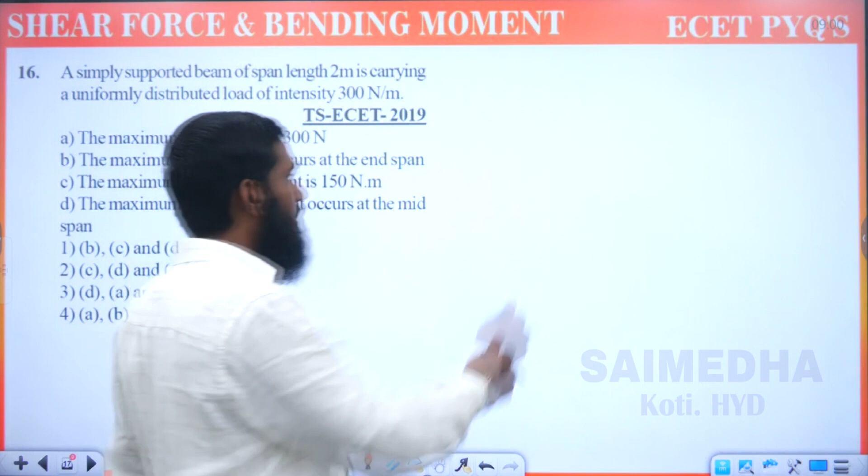Okay, so first let us try to diagram what we are having over here. Simply supported beam - if you are having a simply supported beam, so this part we have taken, this is the simply supported beam. Now next point, length - how much we are having over here? 2 meter. So this complete length we are taking as 2 meter.

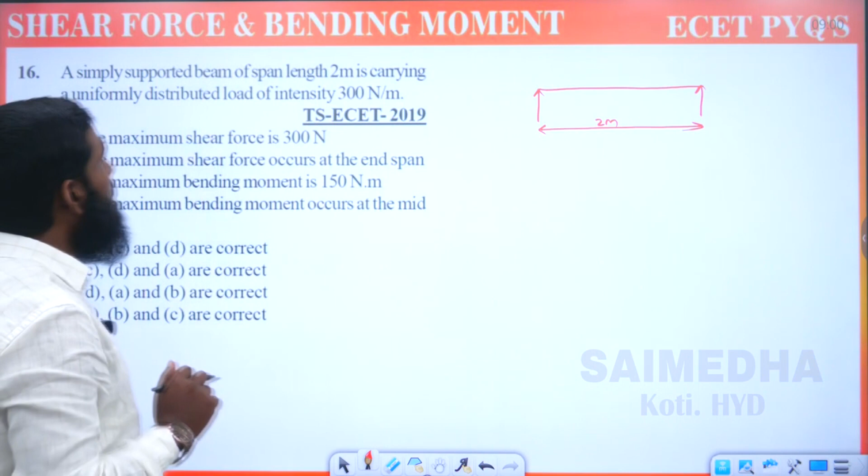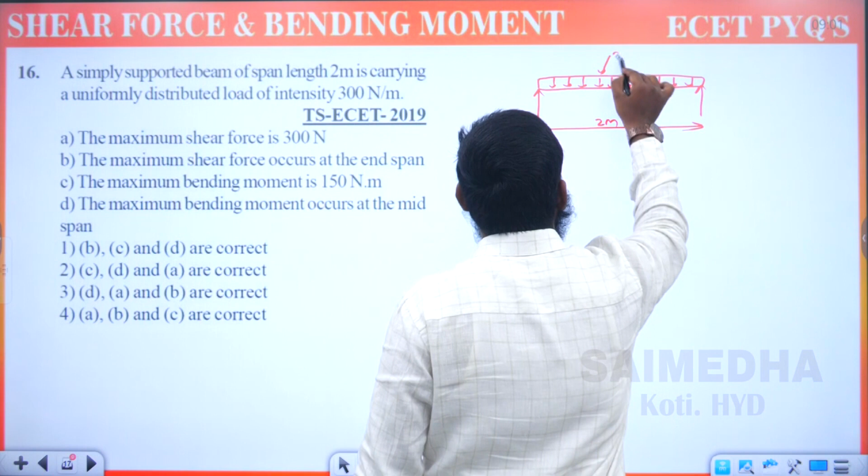It is carrying a uniformly distributed load. Now we are having uniformly distributed load over here - this is UDL. How much we have taken? UDL means how much we have taken over here? 300 - this is 300 Newton per meter. So 300 we have taken as the UDL.

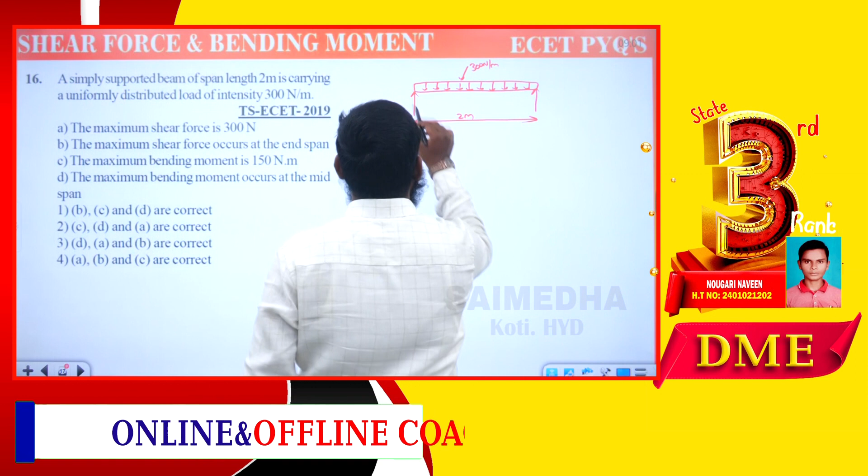Now we are having some options over here. So first let us go with this part. Let us take this point as A, this point as B. So this is RA, we are calling it RA, this is RB we have taken, and somewhere in the middle we are taking it as point C.

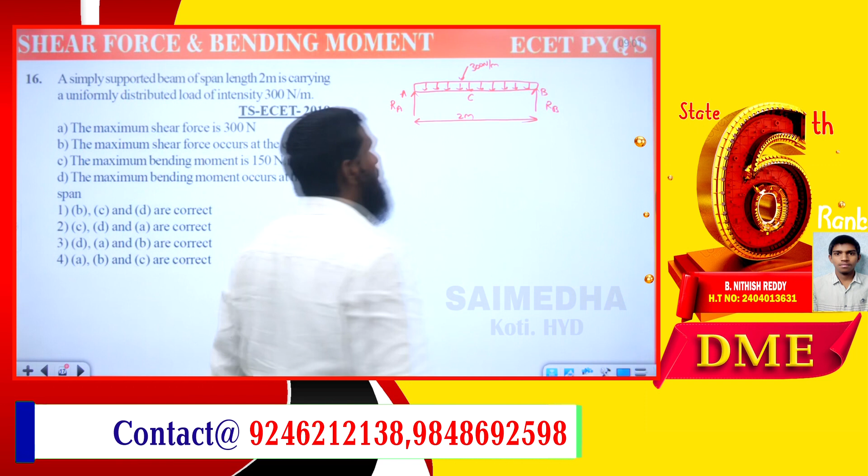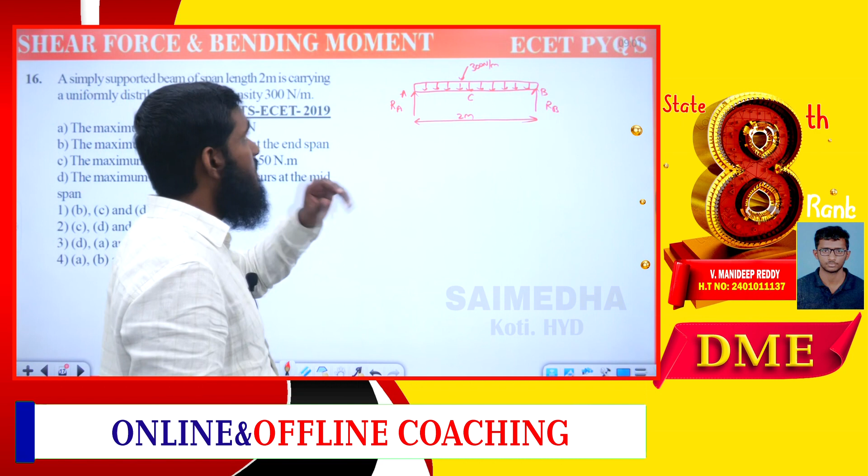Okay, so already we have discussed this question in detail - we have written it in detail over here. So what we are getting in this part - the maximum shear force, what is the shear force we are getting? First let us try to calculate the RA value and RB value.

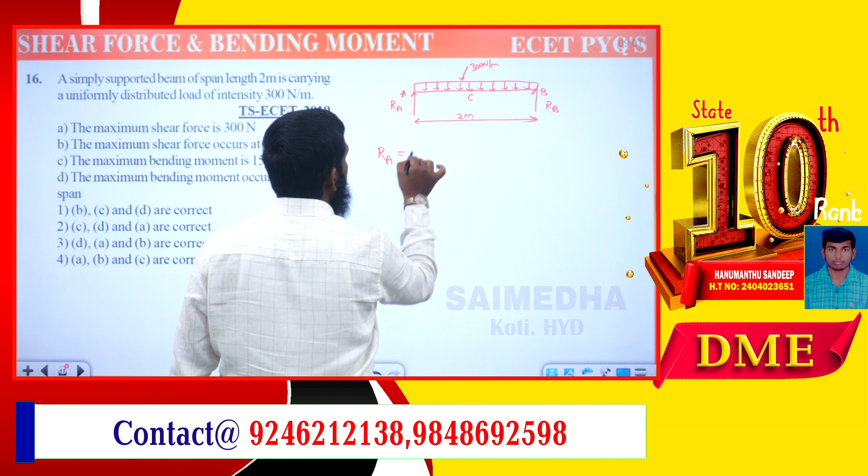RA value is equal to RB value because we are having UDL. If you want to convert that UDL into a point load, it will be in the middle of that part. So RA is equal to RB, which is W into L. W into L means 300 into 2.

Divided by 2, W into L by 2, that is for the UDL part. Or else if we are having a central point load, we have to take W by 2. So over here, as we are having this, the 2 gets cancelled, and it is equal to 300.

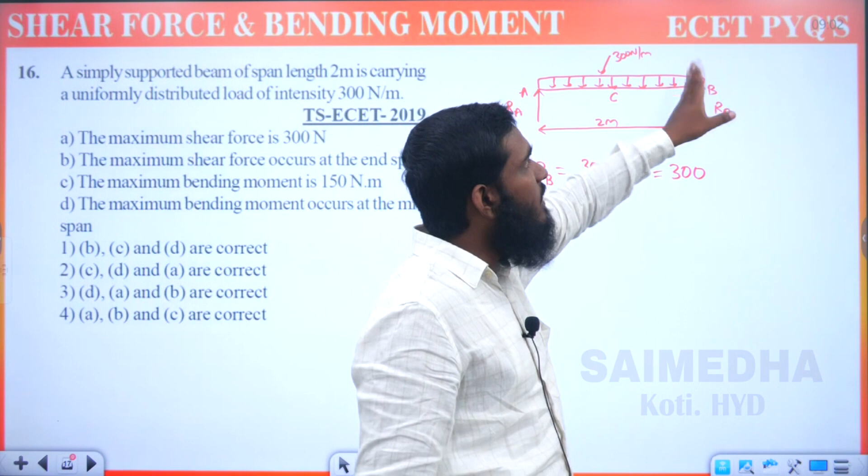Now let us see this part. So RA equals RB is completed. But whenever we are calculating the shear force, listen carefully. This part, shear force at point B, it becomes minus 300. Because if you are drawing the imaginary line over here, it comes under quadrant 4. Quadrant 4 means we have to take negative. Quadrant 1 and quadrant 3 will be positive, but quadrant 2 and quadrant 4 will be negative. So this part we are getting as minus 300.

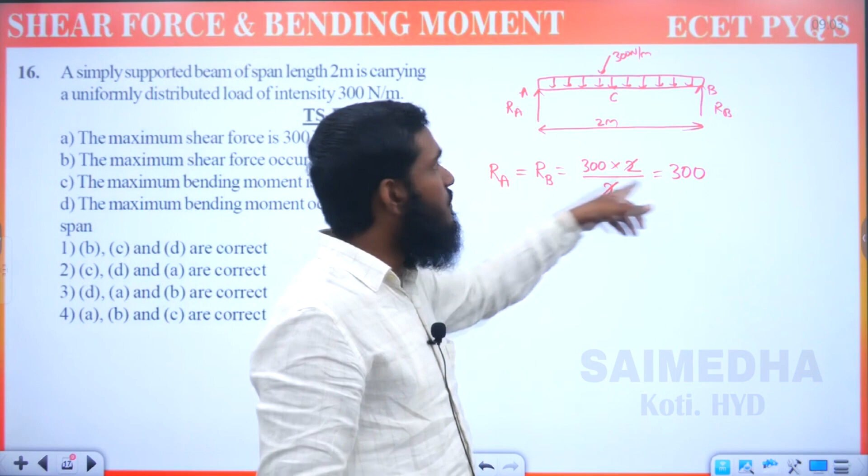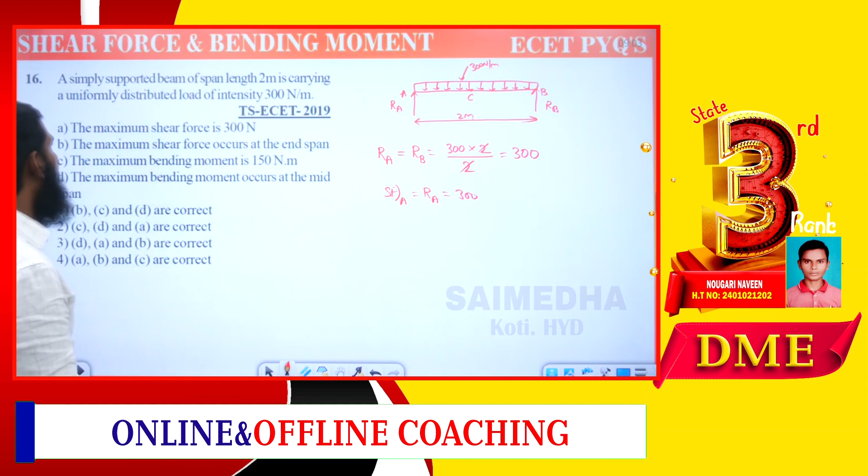And we have taken some section over there. In the previous question we have done in detail about that part. So shear force at point C we are getting as 0. Then shear force at point A is equal to RA, which is equal to 300. So this part we have taken over here. 300 newtons means option A is correct.

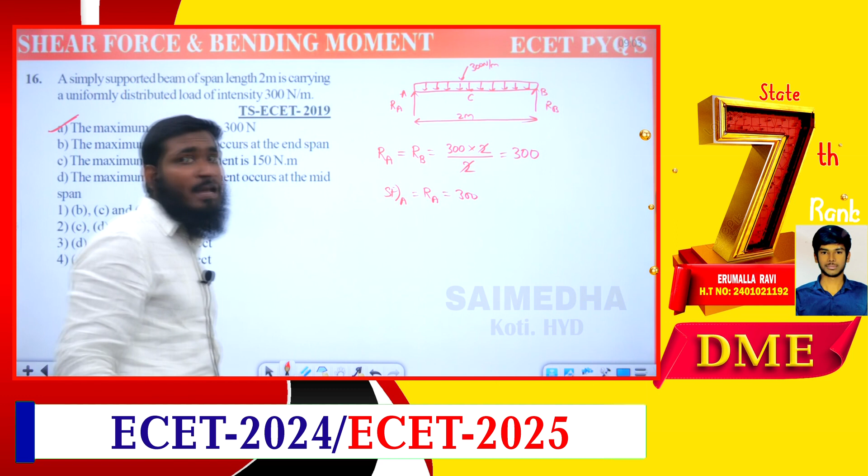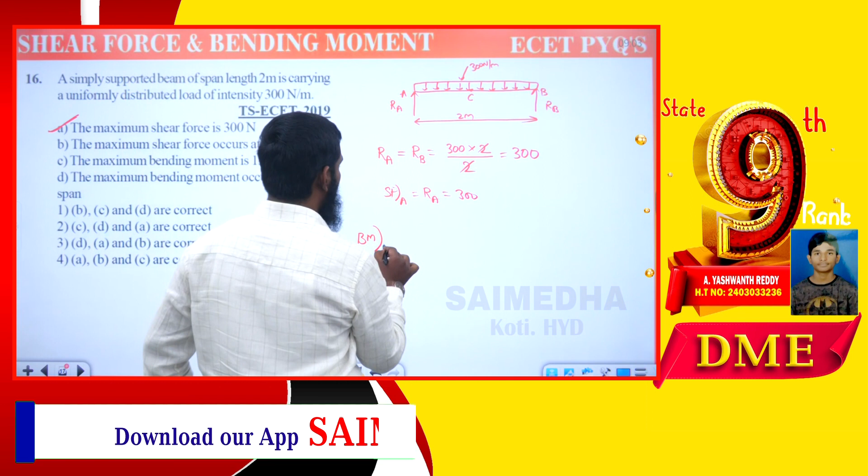Now next, what we are taking: the maximum shear force occurs at the end span. End span means we are not calling this part end span. Let us go for maximum bending moment. What is the formula for maximum bending moment over here? So bending moment, as we have discussed, at point A is equal to bending moment at point B, which is equal to 0.

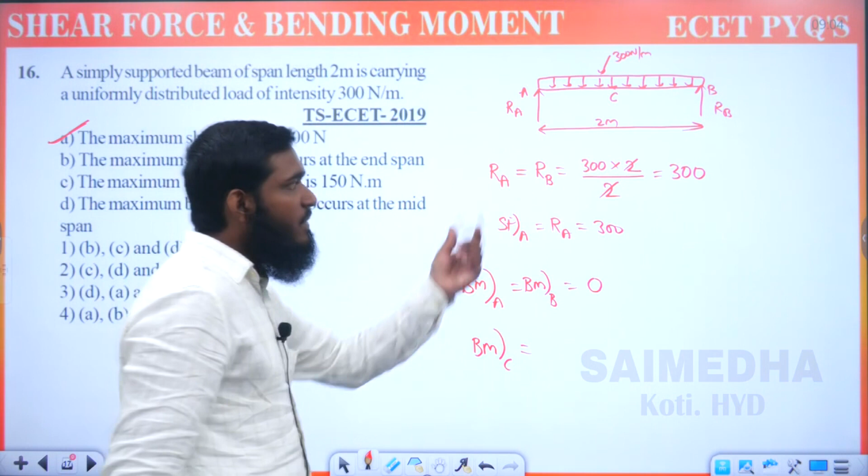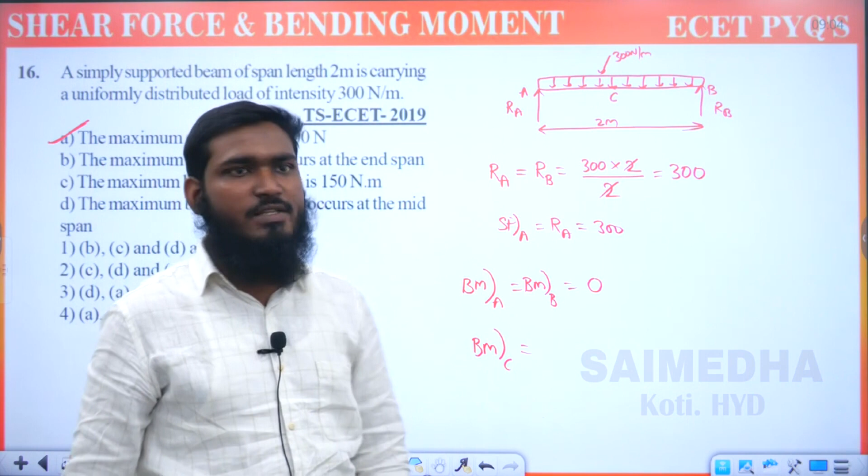Now at the supports, whatever supports we are taking over here, bending moment at point A and bending moment at point B, directly we can write the answer as 0. But bending moment at point C is equal to... shear force at point C becomes 0. So whenever the shear force becomes 0, bending moment becomes maximum. We have taken that case over here. So bending moment at point C, we have to remember that formula: WL square by 8.

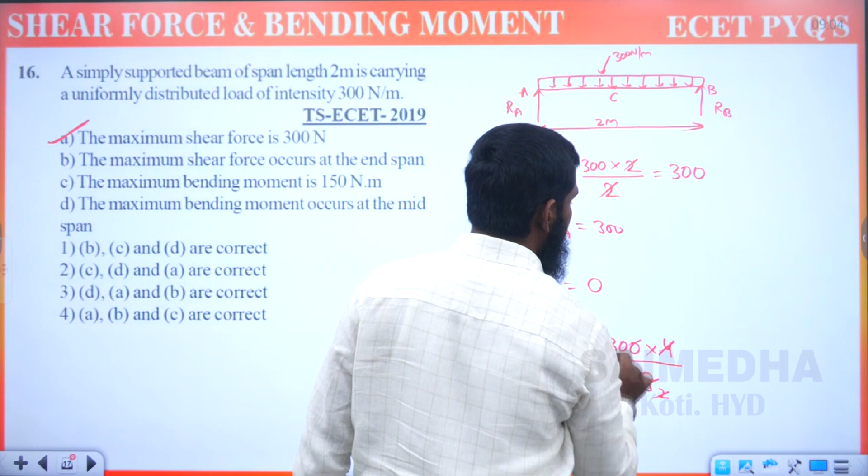What is the formula we have to remember? WL square by 8. Now what is the W value we are having? W means 300 we have taken over here, 300 into L square, L means 2 square is 4, divided by 8, that gives 150, Newton meter. So 150 Newton meter, whatever the maximum bending moment we are having, it is equal to 150 Newton meter.

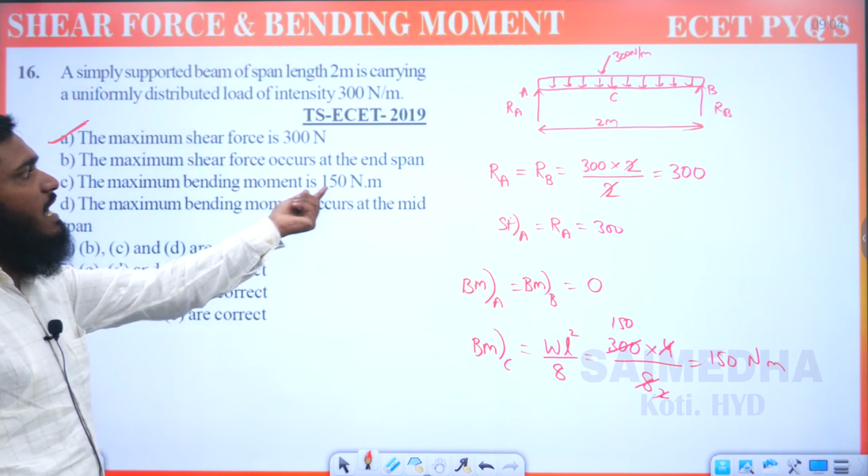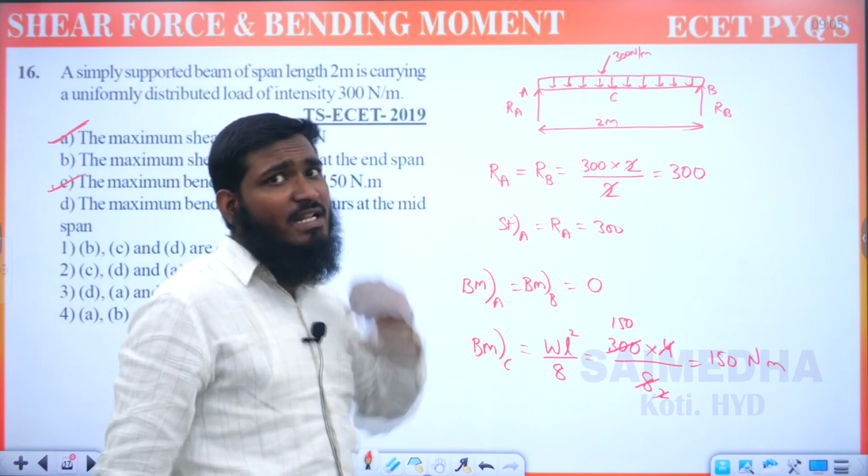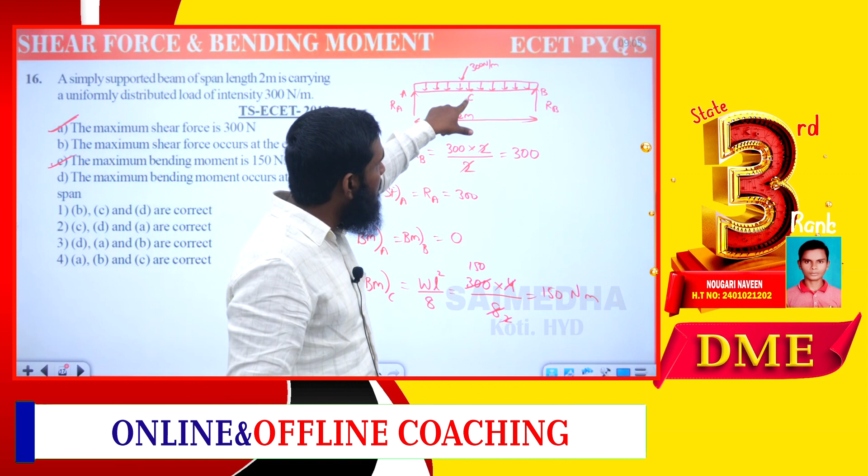So this option C is also correct. Now next, the maximum bending moment occurs at the mid span, because where we are getting the shear force, if you have taken point C, at that point shear force becomes 0. So if the shear force becomes 0 at point C, at that point only we are getting bending moment as maximum, meaning the midpoint. At the midpoint we are getting maximum bending moment. So point D is also correct.

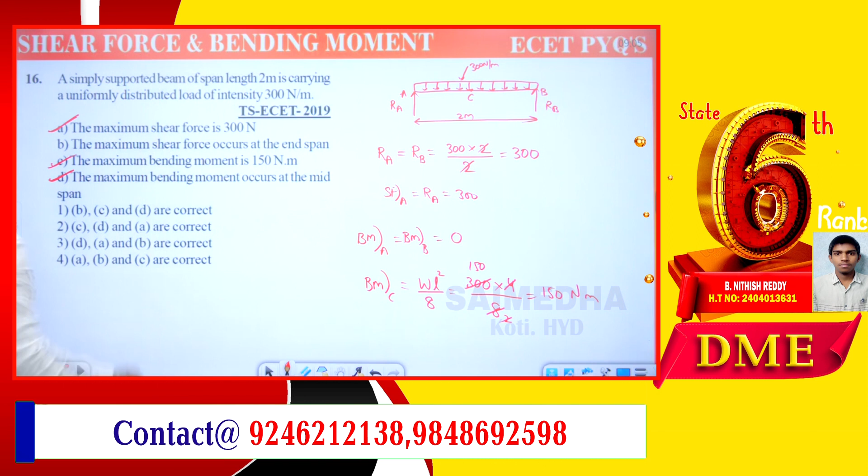So ACD, suppose if you are going with ACD over here, what is given?

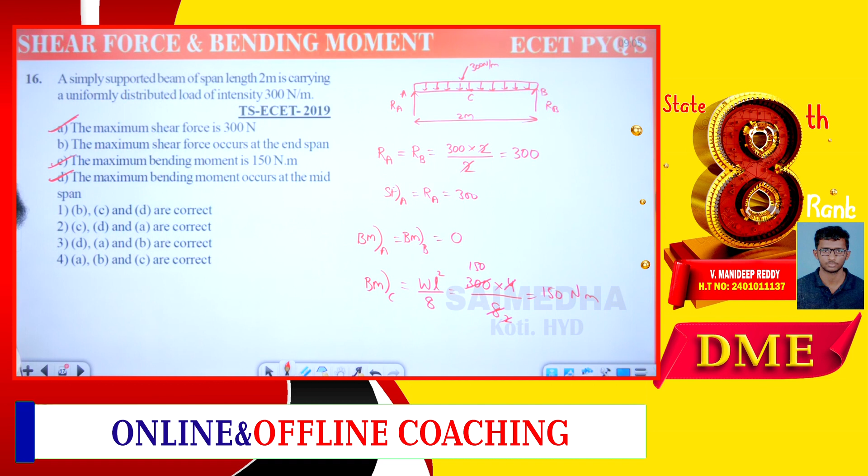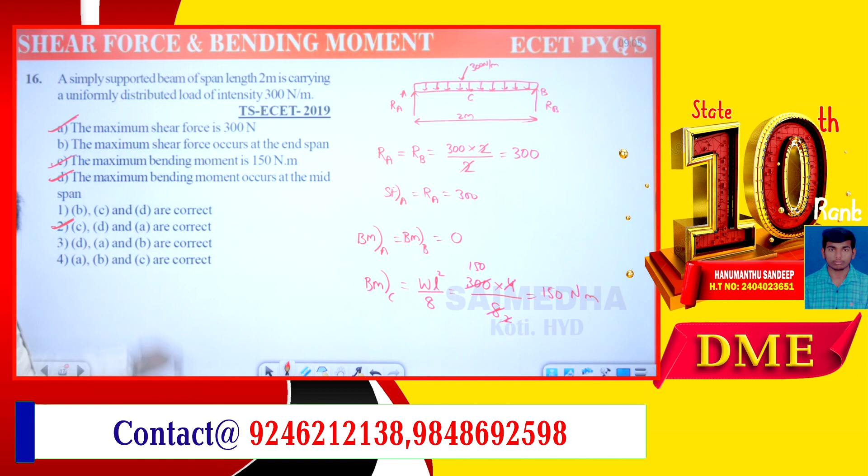BC, only BCD is given, CDA is given. A option, D option and C option means second. Okay, second option is correct over here. Now we have to find out only the force value; we have done the bending moment value.

Now we are having one relation between shear force, bending moment and the rate of loading. What is that relation? Whenever we are differentiating moment, d by dx, what are we getting? A shear force.

Over here also, whatever the bending moment is given, if you are differentiating this part, we will be getting a shear force. Again if you are differentiating shear force, then we will be getting rate of loading. Like that we have to remember these relations. If you are differentiating bending moment, it is equals to shear force. If you are differentiating shear force, it is equals to rate of loading. So let us differentiate this.

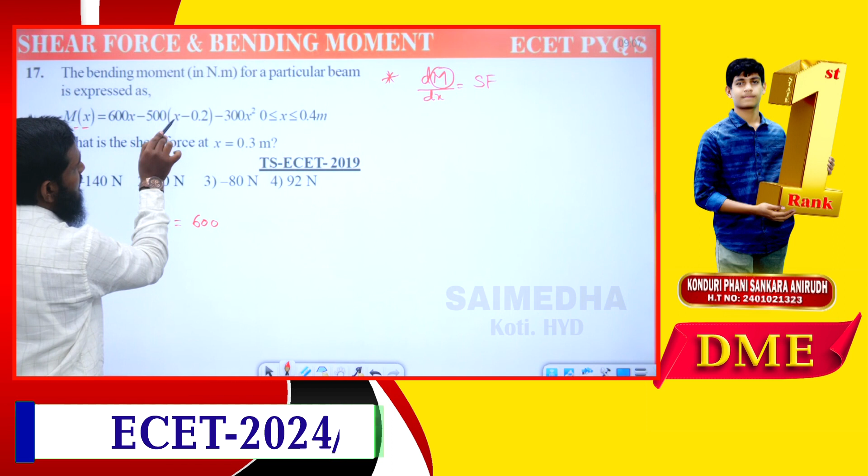Now if you are multiplying with this, minus 500x, again d by dx of x means 1, so we are having minus 500 over here. Now minus into minus plus 500 into 0.2 we are having, means numerical value. D by dx of constant will become 0. So for this numerical value we are getting the answer as 0.

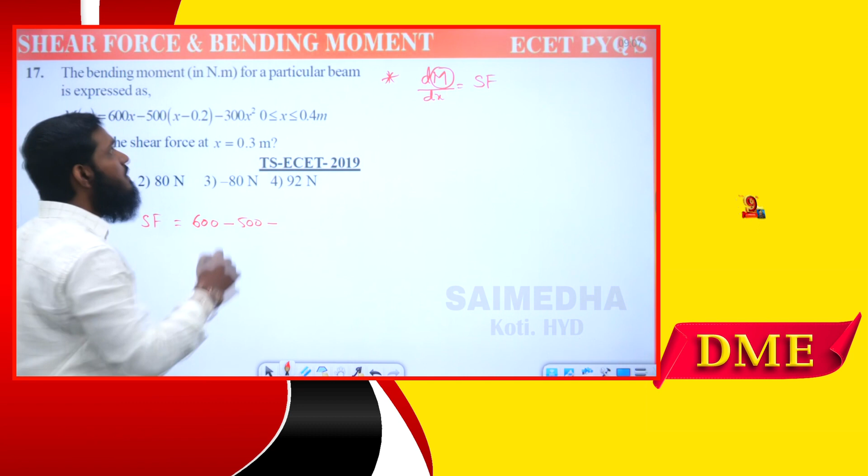Now next part, minus we have taken. Now x square will become 2x. D by dx of x square means 2x. So 2 into 300 means we are having 600x. Okay, so this is shear force.

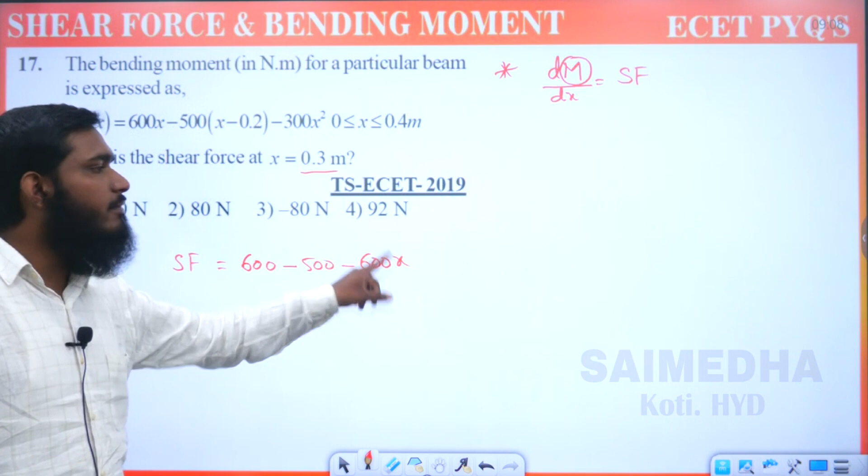But we are not getting any exact value over here, so we have to substitute the x value, 0.3, over here. If you are substituting 0.3, let us see what we are getting. So 600 minus 500 means 100, minus 600 into 0.3. Okay, this part we have taken.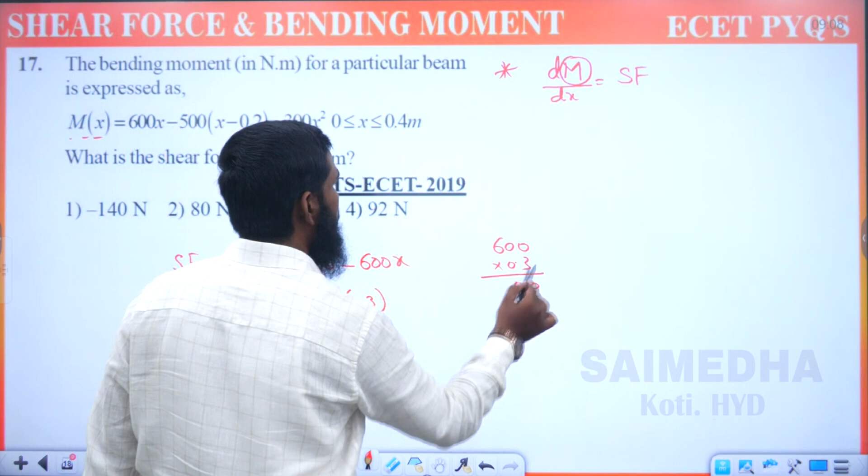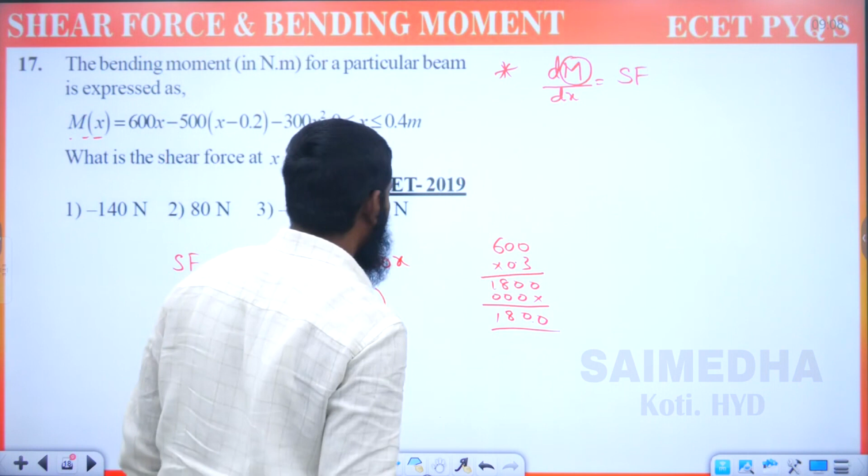Now we have to multiply this part. If you are multiplying, 600 into 0.3 means 18, and then 000, so we are getting the answer as 1800. After one number we are having the point, meaning we have taken 1 point over here. So it is equals to 100 minus 180, which we are getting as 100 minus 180 means minus 80 newtons. Okay, simple concept we are having.

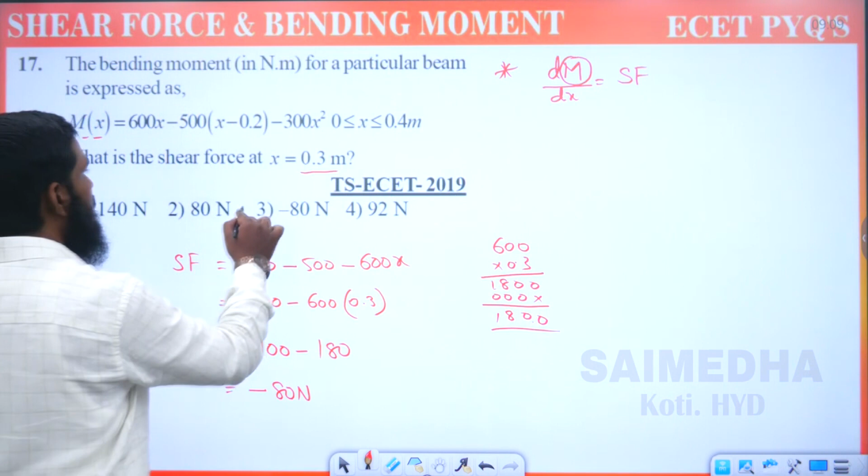Whenever the bending moment equation is given, we have to differentiate that part. If we are differentiating, we are getting shear force, but we have to substitute the x value also. So we are getting the answer as minus 80. Third option is correct: minus 80. Now next one, the point of contraflexure.

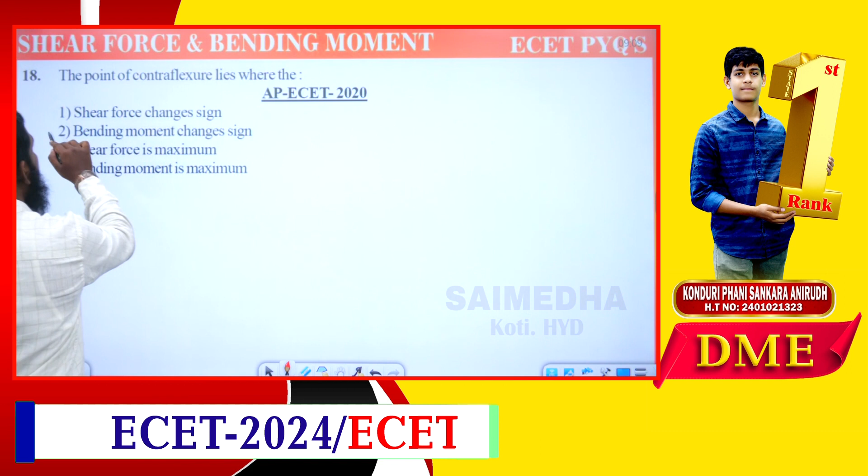Again the question is repeated over here: the point of contraflexure lies where the shear force changes sign, bending moment changes sign, shear force is maximum, or bending moment is maximum. What is the answer? Bending moment changes sign - then we call it the point of contraflexure.

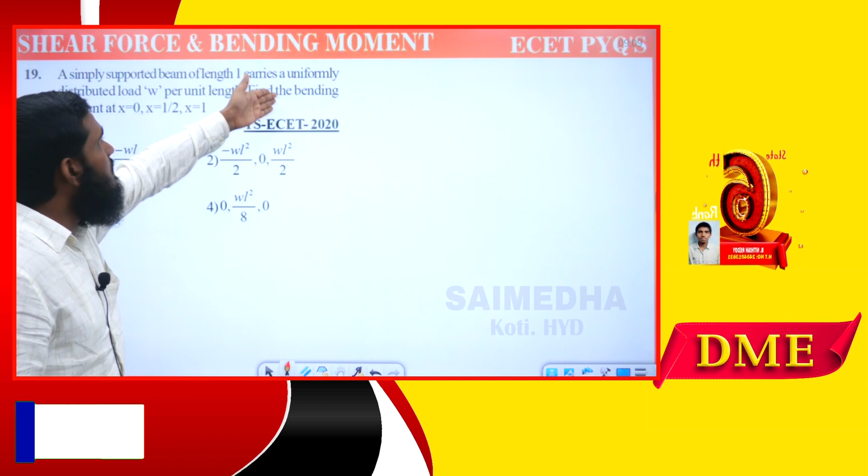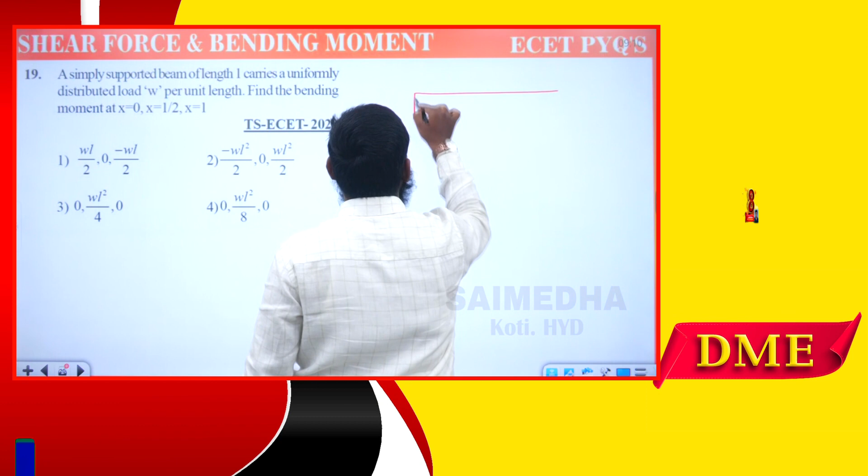Now next part: a simply supported beam of length L carries a uniformly distributed load W per unit length. Find the bending moment at x is equals to 0, x is equals to L by 2, x is equals to L. Already we have discussed this question over here. Just now also we have taken this simply supported beam, and we are having length L carries a uniformly distributed load - this is the uniformly distributed load we have taken.

Uniformly distributed load like this we have taken. So this is RA and this is RB. If you are taking this part as W and this complete part we have taken as L, then RA is equal to RB is equal to WL by 2. So RA value and RB value is equal to WL by 2 we have taken.

Now next, listen carefully. Suppose at this point we are taking it as point C. If you are calculating the shear force at point B, if you draw an imaginary line over here, it is coming under the fourth quadrant. If it is under the fourth quadrant, positive or negative? Negative. So we have taken minus, and RB value is WL by 2, so minus WL by 2. Shear force at point B is equal to minus WL by 2.

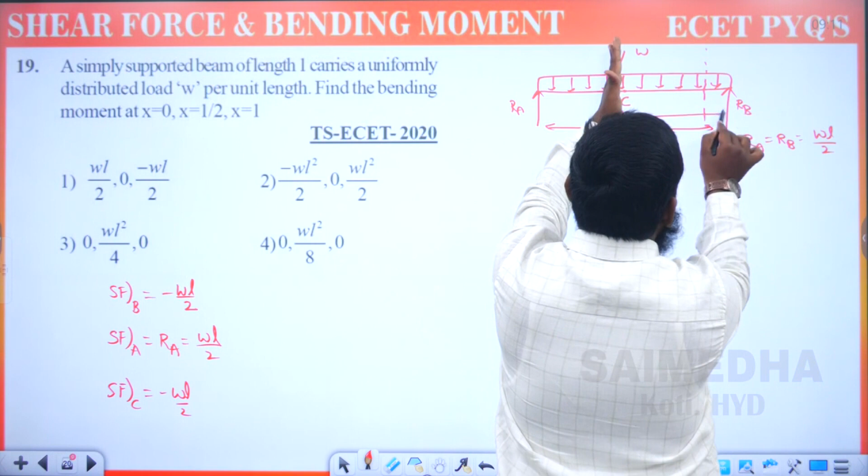Next, shear force at point A is equal to RA, which is equal to WL by 2. Now if you want to calculate shear force at point C, already we can write minus WL by 2. At point C, let us take this distance as L by 2.

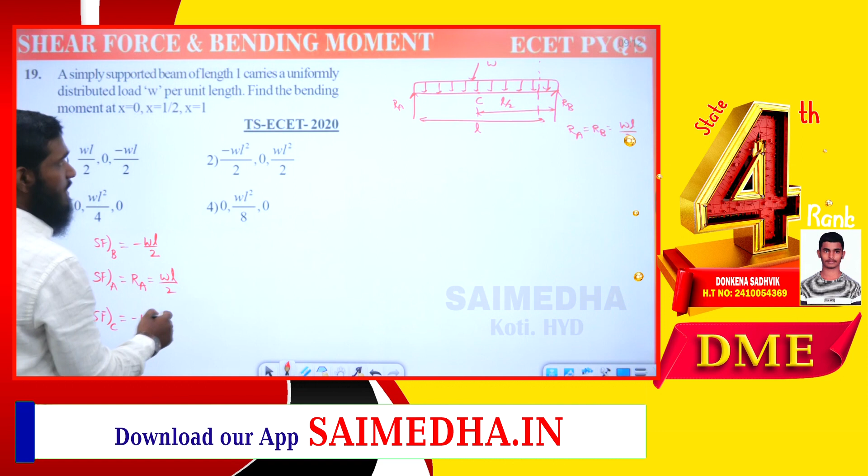Up to this point, what is the load? W into L by 2. Area, length into breadth, means W into L by 2. If you consider the complete UDL we take WL, but up to point C only, we take W into L by 2. Because these loads are acting downwards, the imaginary line comes under the first quadrant, so we take plus WL by 2. Minus WL by 2 plus WL by 2 means 0. So these are the shear force values we are getting.

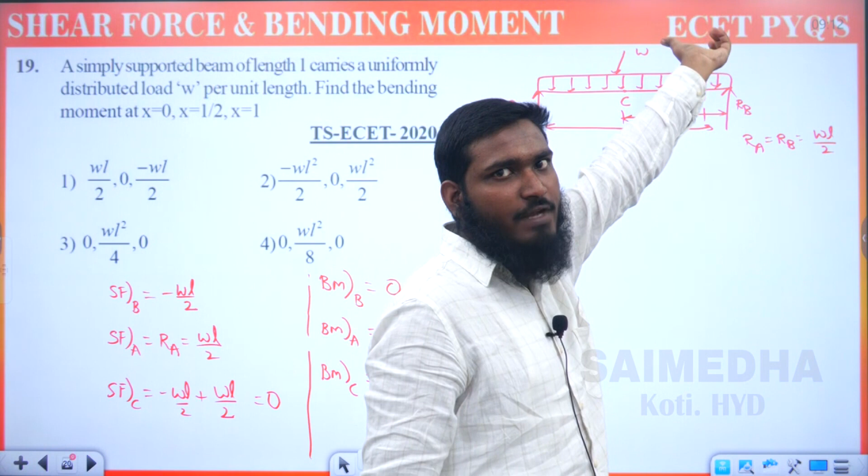Now we have to calculate bending moment values. As I have told you, bending moment at point B is equal to 0, and bending moment at point A is equal to 0. Now we have to calculate bending moment at point C. First we take this part. Is it positive or negative? As it is moving upwards, smiley face, so positive. So we have WL by 2 into the distance, which is L by 2.

Now next part, listen carefully. This is RB we are having over here, and we are converting that UDL into a point load. This complete length up to point C is L by 2. But as we are converting this, this will become L by 4, and this is also L by 4.

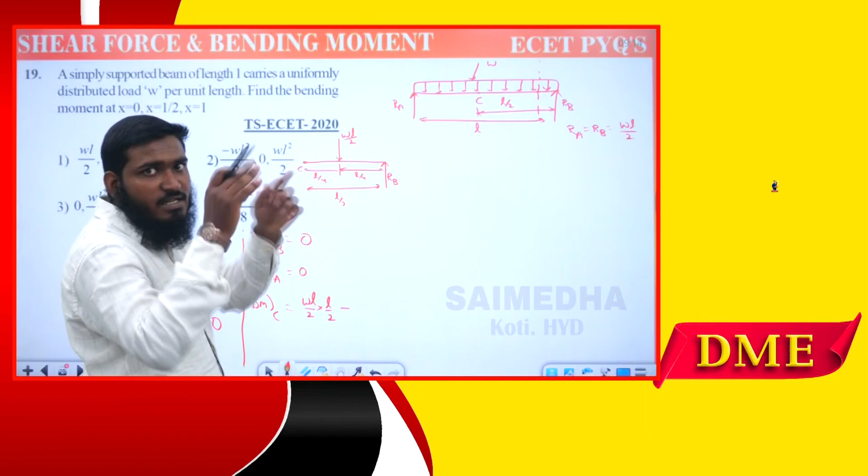Now this RB we have calculated, and whenever we are converting that UDL into point load, what we can do over here is W into L by 2, WL by 2; this point load we have to take over here. Now next, let us take this one. If you are taking this one, we have to take it as minus, because this load is acting downwards, meaning it is becoming a sad face over here. So we have taken minus.

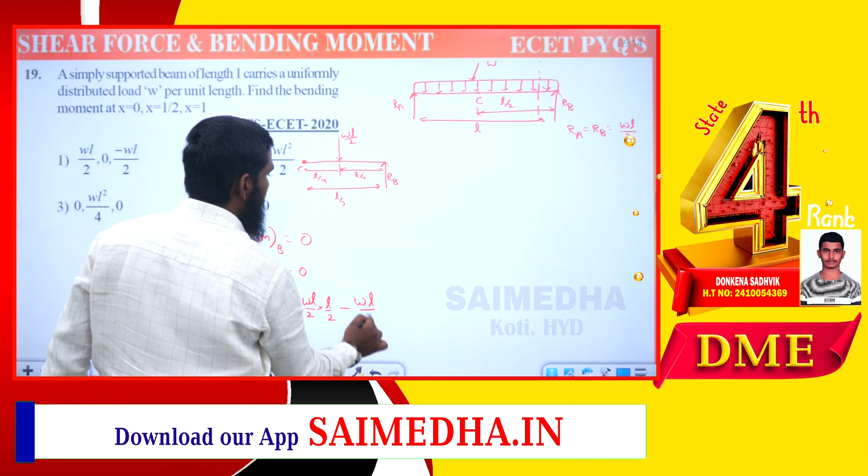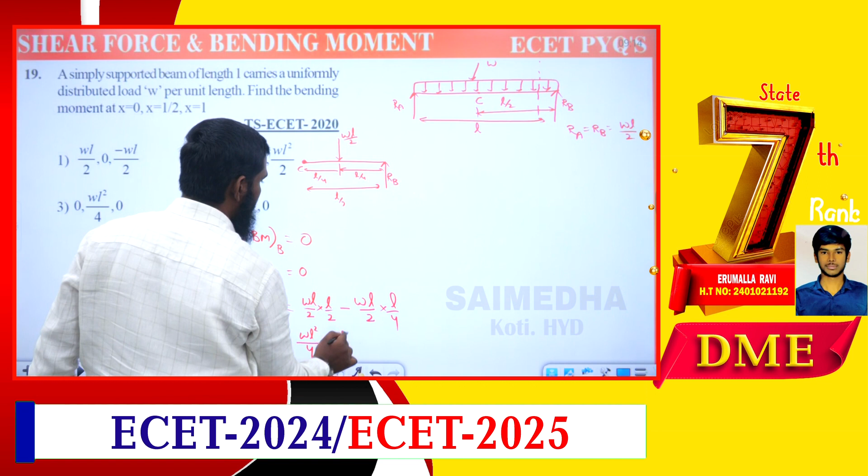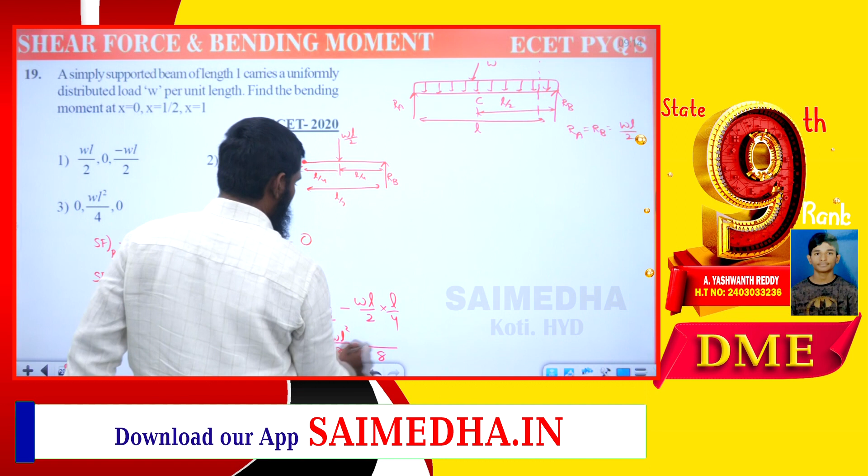Now up to point C, what is the moment we are having? Force into perpendicular distance. The force is WL by 2, and the distance is L by 4. So it equals WL square by 4 minus WL square by 8. Now if you simplify this part, the LCM will be 8, and the numerator will be WL square. So the answer is WL square by 8. Bending moment at point C is equal to WL square by 8.

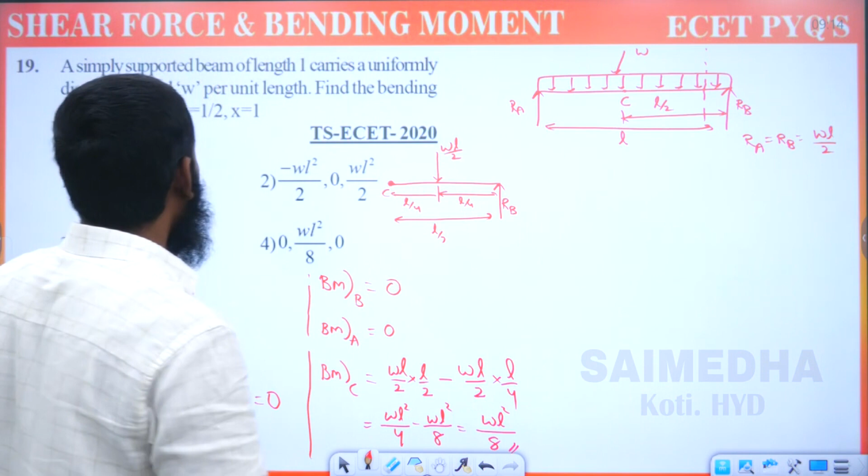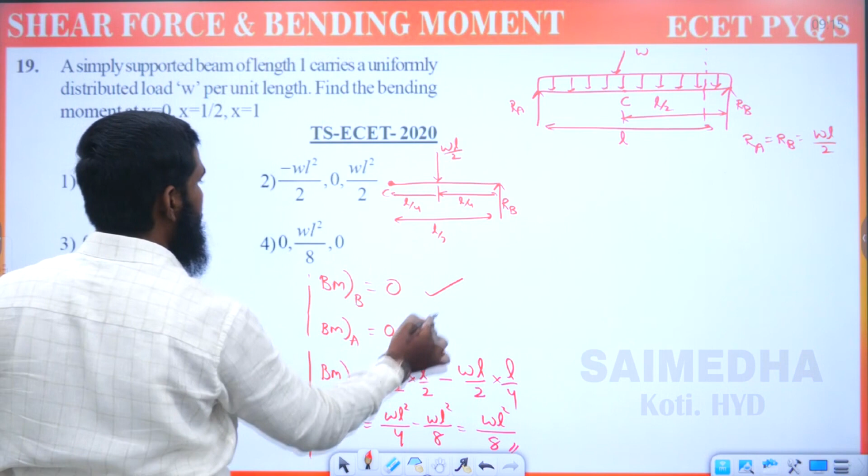So over here also we are getting the answers. A simply supported beam of length L carries a uniformly distributed load W per unit length. Find the bending moment at X equals 0, X equals L, and at the middle, X equals L by 2. At X equals 0 and X equals L, the answers are 0, 0. At X equals L by 2, we get WL square by 8. So the answer is 0, WL square by 8, 0. The fourth option is correct.

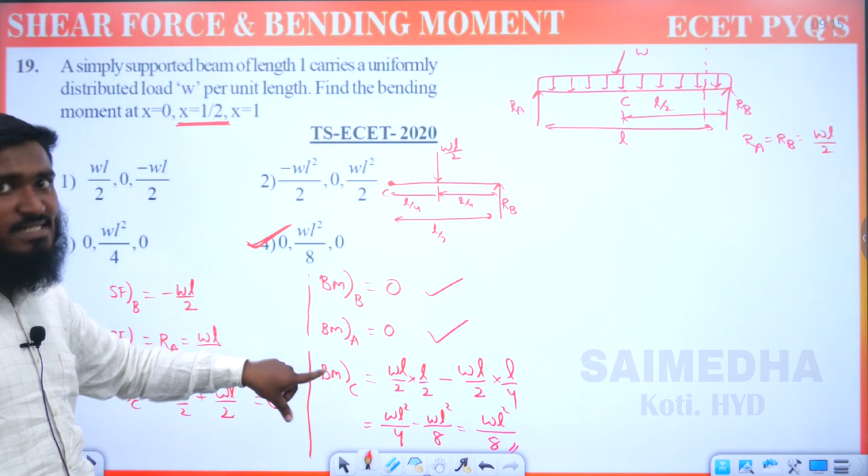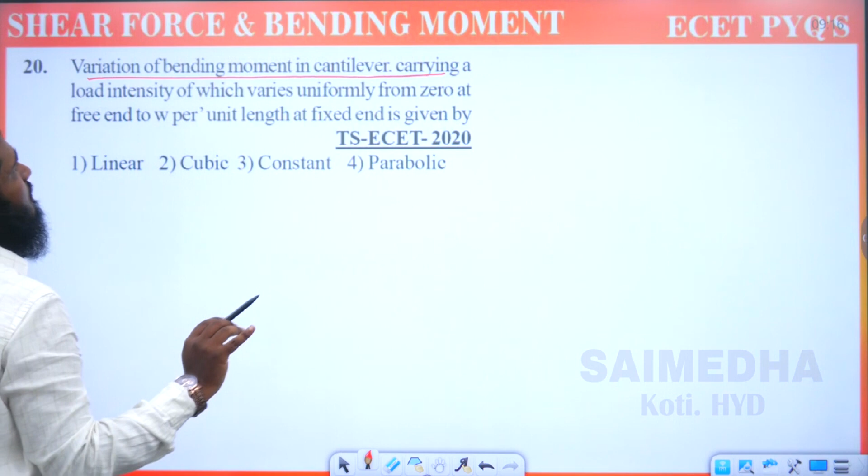Now next: variation of the bending moment in a cantilever carrying a load whose intensity varies uniformly from 0 at the free end to W per unit length at the fixed end is given by: linear, cubic, constant, parabolic. So we have a cantilever with a uniformly varying load. What do we get for the bending moment diagram?

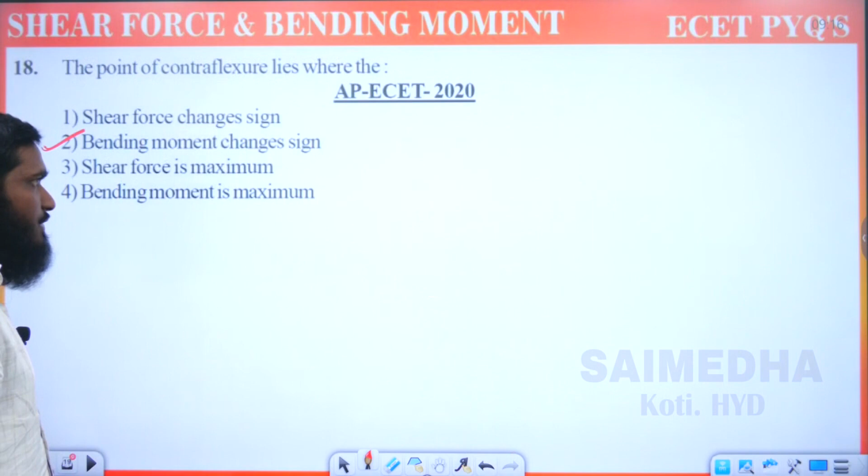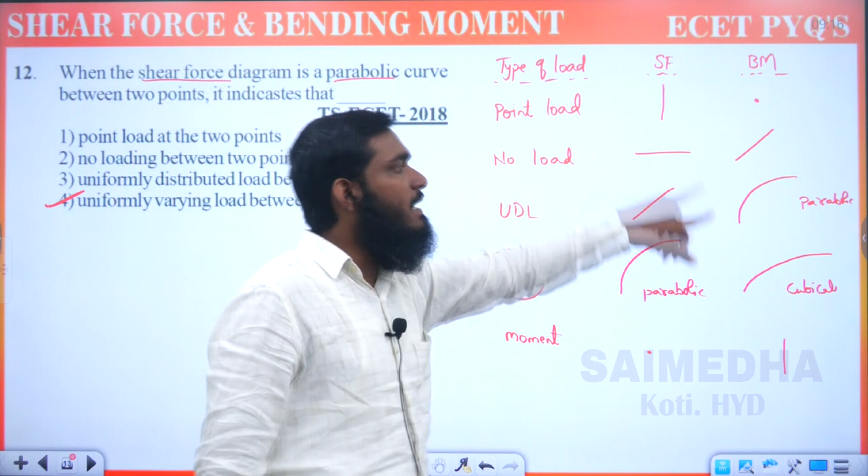Just now we have taken these symbols over here, let us check this part. Whenever we have a uniformly varying load, the bending moment is cubical. We get a cubical figure over here. If it was shear force, then we would go for parabolic. But if bending moment is asked in the question, we have to go for cubical. So it will be cubic; the second option is correct.